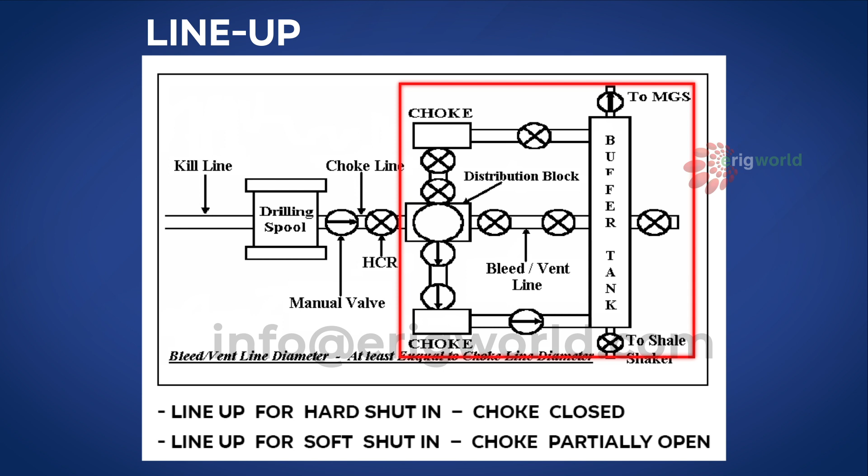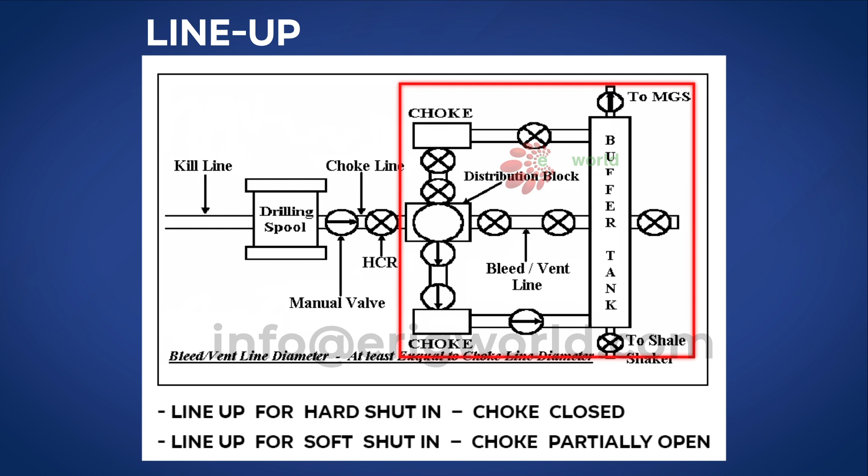Now, this is the choke manifold. Why are there two chokes incorporated in a choke manifold? It is because if I lose one of the chokes, maybe a choke washout or choke plug, then I have the other choke as a backup. Now, whenever we kill a well, we make sure that we kill the well using the auto choke or hydraulic choke. How is the choke operated from the remote choke panel? By means of hydraulics. I require 3000 psi hydraulic pressure to open and close the choke. It is operated by hydraulic fluid, not pneumatic.

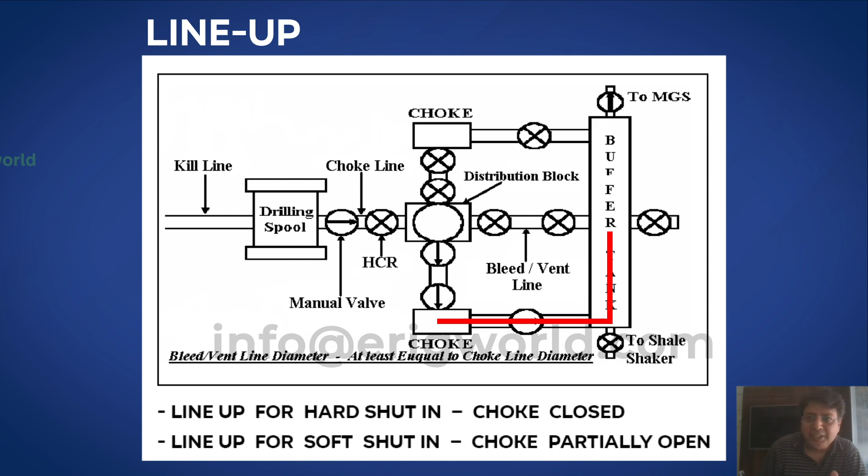Now I have got two different sets of chokes. Whenever I plan to kill a well or line up, I have to select one choke at a time because I can't kill the well using both chokes. Let's say I selected the lower choke. Now the common lineup, starting from the manual valve: the manual valve is always open. From HCR to choke is the choke line, and all the valves there are manual valves, so they should be open, because if one side of the gate has pressure and the other doesn't, you can't operate that valve. From choke to MGS, again all manual valves, so this line should be open. So this is the common lineup.

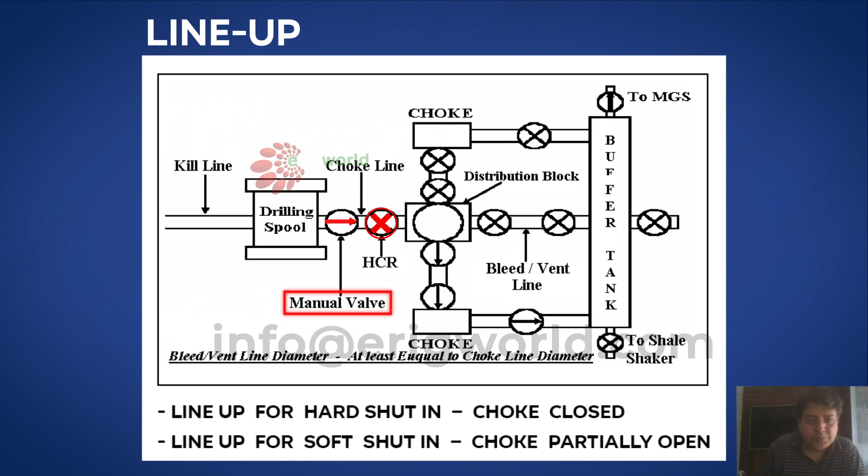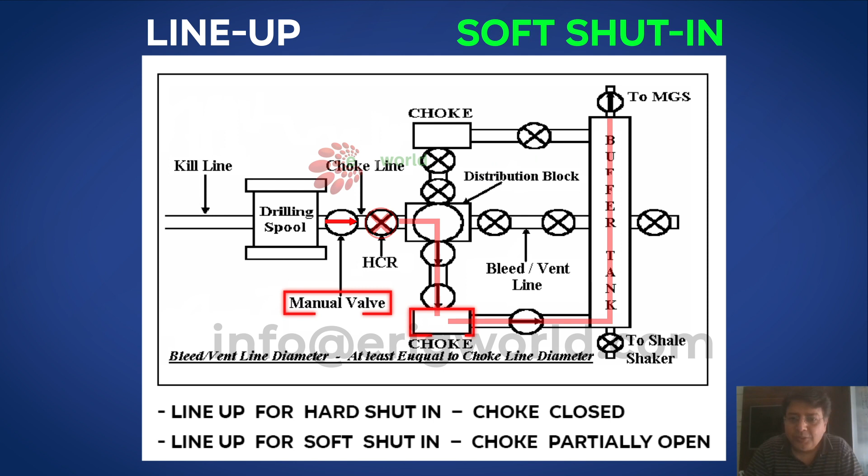Now, HCR, the hydraulic choke line valve, is always closed, whether you line up for hard shut-in or soft shut-in. So the common lineup says: manual valve always open, HCR closed, line from HCR to choke always open, choke to MGS always open. The only thing remaining is the choke. For soft shut-in, we keep the choke open. So in soft shut-in, only HCR is closed in the lineup; the rest are all open. This is the common lineup and soft shut-in lineup.

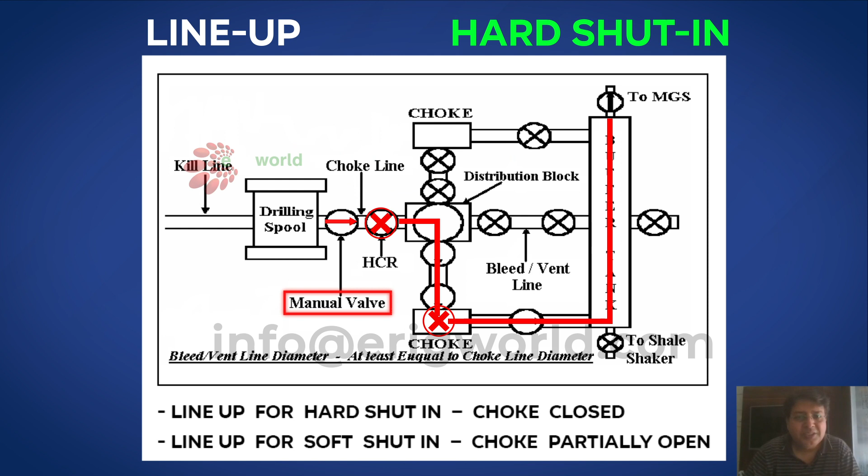Now let us see the hard shut-in lineup. The common lineup applies: manual valve always open, HCR always closed. HCR to choke line has all manual valves and should be kept open. Choke to MGS will also be open. So whether you line up for hard shut-in or soft shut-in, leave the choke, and everything else is as shown in the figure. For hard shut-in, the choke is closed, because we know the formation is very strong, so the water hammer effect pulse going downhole will not harm my formation.

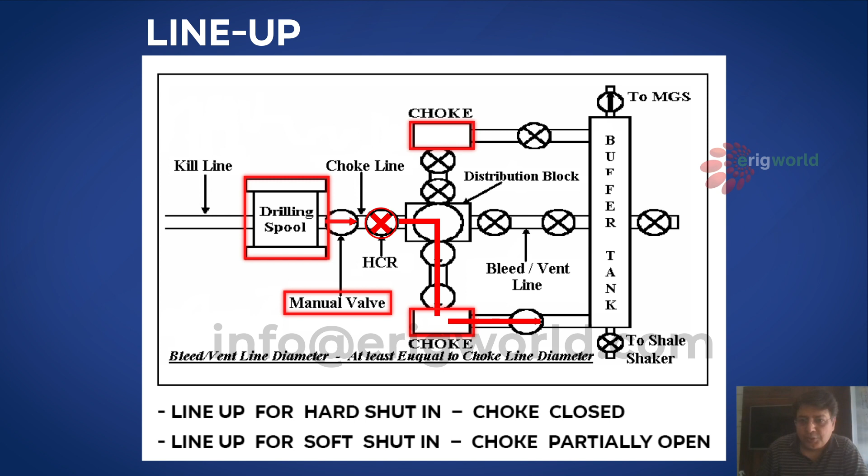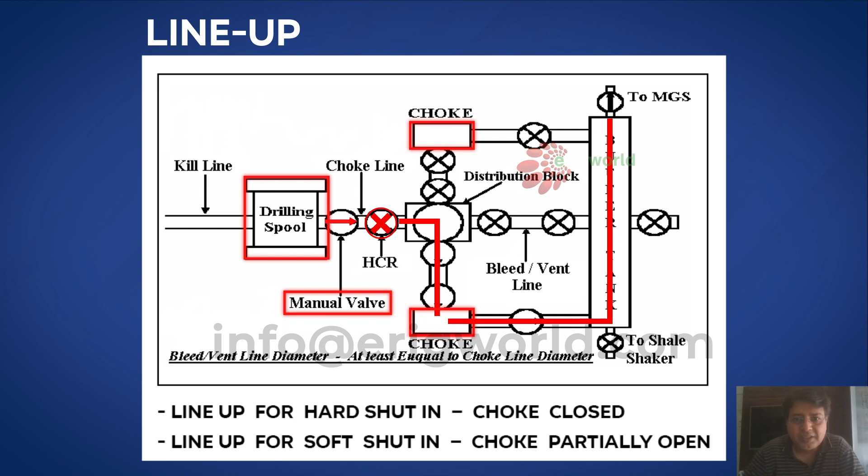So once again, let us revise. Common lineup: from the drilling spool, the manual valve should always be open, HCR should always be closed. HCR to choke, whichever choke I use, should always be open. Choke to MGS is open. So the only thing I have to remember for any lineup, hard shut-in or soft shut-in, is the choke. For soft shut-in, the choke is open. For hard shut-in, the choke is closed.